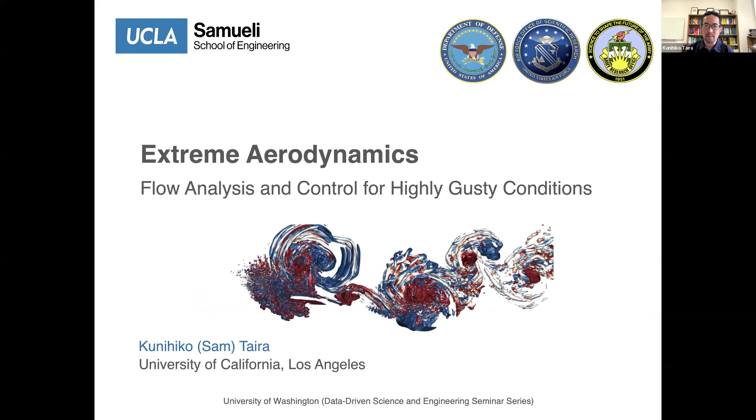So like Nick said, this is supported by the Department of Defense under the Vannevar Bush Faculty Program, and it's been something that's been keeping us quite busy for some time now. Okay, so let me get started.

Before I get started, let me acknowledge a few people, or actually a group of people. There's been an army of students and postdocs involved in our effort. Kai, Luke, Hiroto, and Vinasri are some of the main people involved. Many of them have moved on past UCLA to join as faculty or now postdocs. And of course, there are many more people who are not on this list.

We also have a wonderful group of collaborators that we get to work with. Steve, of course, has been a longtime collaborator on some of these topics. And we've been very fortunate to get a lot of support from our program managers at the Department of Defense: Greg, Doug, Matt, and John-Luc. Okay, so let me get started.

So I'm going to talk about extreme aerodynamics, but before that, you all fly, right? You've all flown on airplanes, and there are very different kinds of airplanes that serve different roles in our society. Some of you might have seen some of these airplanes. They come in different shapes, sizes, and have different ways of keeping themselves aloft in air.

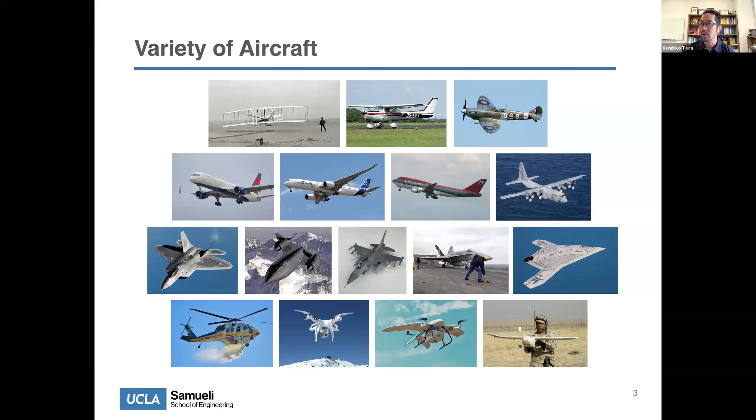But I'm not going to talk about most of these airplanes today. I'm going to talk about something that's quite different from a lot of these airplanes. By the way, a lot of these airplanes fly in cruise conditions, so they're mostly operating in what we would call a steady or quasi-steady condition, okay?

So when we talk about the airplanes I just spoke about, this is what we think about: an obstacle-free environment. This is a picture I took out of a window from one of the Delta flights I've taken, at LAX early in the morning. You can see that there's no clutter around the airfield, right? So there's no obstacles around it.

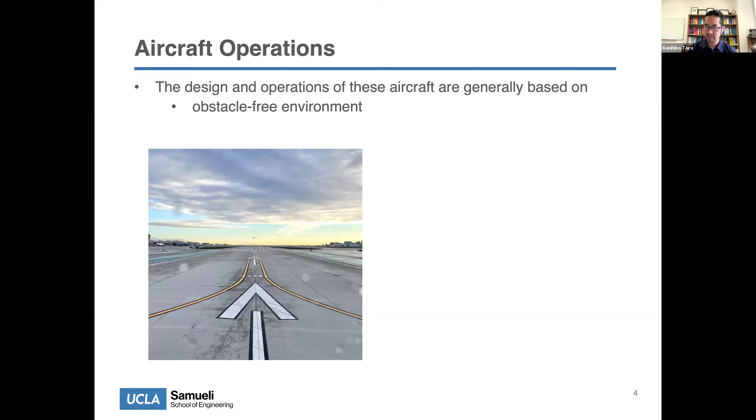And there are strict rules about where you can have obstacles, how far it needs to be from the airplane. And we tend to fly in favorable weather conditions, or we want to, right?

What happened here was there was this gigantic vortex called a hurricane, right? And when you have adverse weather or weather events, you kind of want to avoid that if you want to stay safe in the airplane, or maybe not be bounced around.

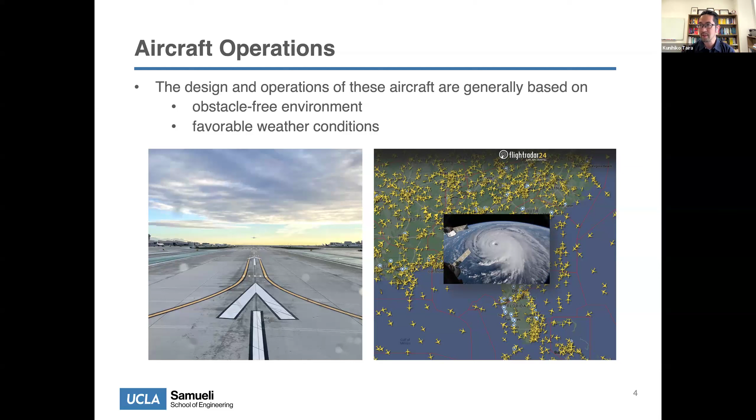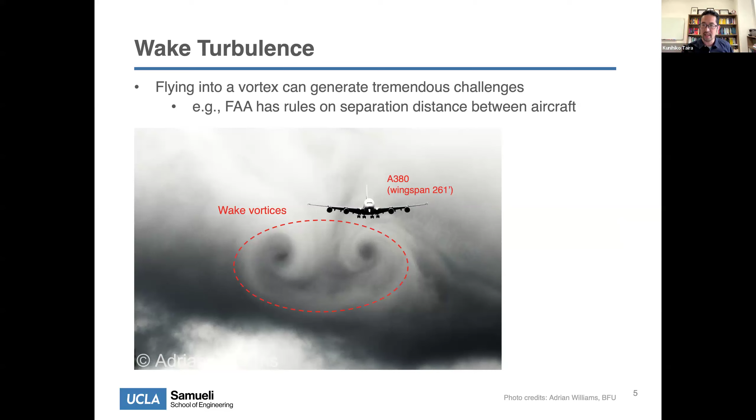The A380, if you've seen it in the past, is a pretty giant airplane. And what happens is it generates a big signature behind itself as it's flying.

You certainly don't want to fly anywhere near those wake vortices, but there was an unfortunate incident over the Indian Ocean where a Challenger 640, an aircraft much smaller than the 380, flew into those wakes a few miles downstream. The wake vortices are pretty strong. They're persistent and will last there for a while. The weight difference between a 380 and a Challenger 640 is about 25 to 1, so it's lightweight compared to a 380. And if you fly into the wake of one of these, bad things can happen.

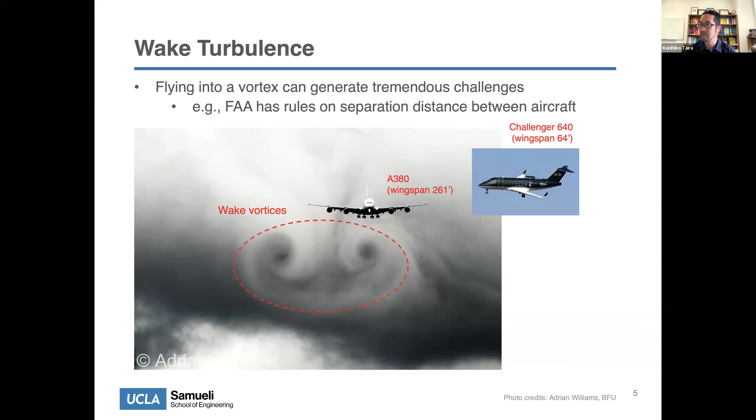By the way, don't think this is only for rich people, although that is a private plane. That's the same thing as well. That plane also serves as regional jets, so you might have actually flown on one of those planes as well.

Here's what happens before and after this plane flew into the wake. Before, I don't know if this is the exact picture, but I'm sure it was a very nice chartered flight. But afterwards, the plane went upside down, bounced around, and you can see bloodstains all over the cabin. There were some critical injuries. Luckily, no one died, but this plane was written off afterwards, and it miraculously did not crash into the ocean and landed somewhere in the Middle East.

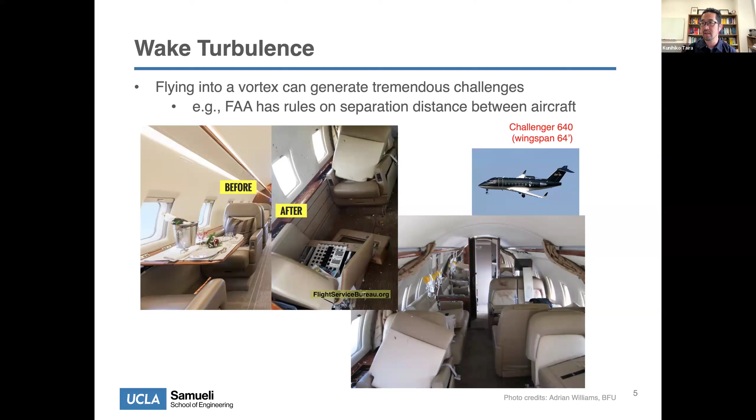So you can see that these wakes that these airplanes make are significant in strength, and can disrupt flight safety. Now, what I'm going to talk about today is not those big planes. I just wanted to illustrate the point that these wake vortices are pretty strong.

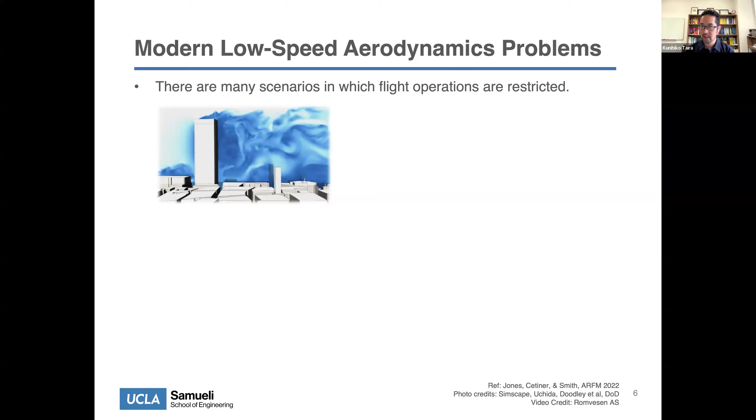Let me talk about modern low-speed aerodynamic problems, where we have many scenarios in which flight operations are restricted. For example, you might have heard of air taxis. But think of trying to fly an air taxi in bad weather, with strong winds that generate a wake behind a building. You might also think of flying a drone for certain reasons, but now those vortices are pretty strong and larger than the vehicle that's trying to fly.

Another instance is when you're trying to perform rescue in a mountainous area on a windy day. The wind speed could be large, and the vortices or wake structures behind a mountain could be maybe even larger than the vehicle you're trying to operate. In fact, this is one of the major reasons why rescue missions are still restricted because of weather.

Another thing that might be interesting to consider is what happens if you want to land an aircraft or a helicopter behind a ship. The ship itself is a large structure and it generates a wake itself. If you want to land a helicopter or rotorcraft behind that ship, you're really landing straight into those vortices. This is a huge problem, not only for manned missions, but also for autonomous systems trying to maneuver with limited sensor measurements.

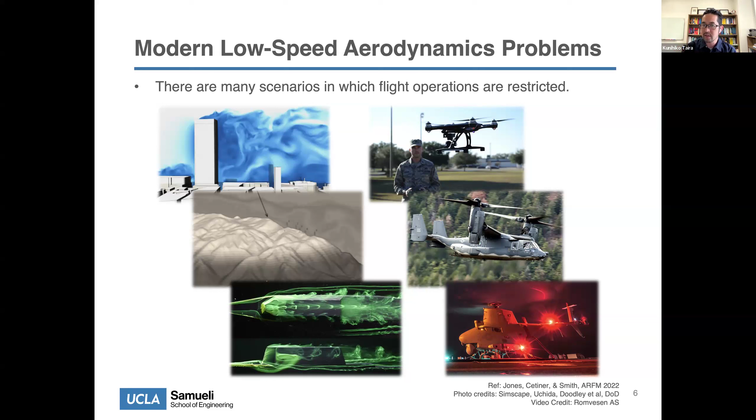So why is this challenging? I'm going to talk about why we're excited to use machine learning and data science for many of these problems. But first, before I talk about the overall problem setup, let me talk about why we haven't really worried about this. If you're on a commercial airliner and you experience a gusty condition or turbulence, and your coffee spills, it really isn't going to compromise the safety of the flight. It's uncomfortable, but not a big deal.

One of the important parameters here is called the gust ratio: the characteristic velocity of the gust that hits the aircraft relative to the cruise speed of the vehicle. Because large aircraft fly so fast, the gust ratio is really low. As you make your aircraft smaller and slower, this gust ratio starts to approach 1, and that's when things become uncomfortable, because at some point you're going to lose the stability of the aircraft. In fact, anything beyond a gust ratio of 1 is traditionally considered unflyable.

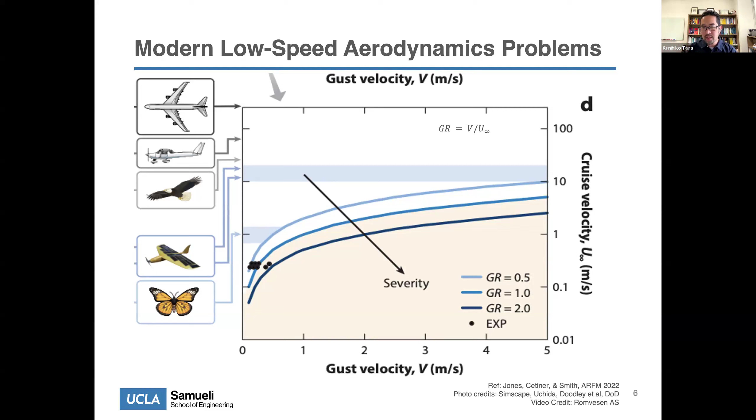In this talk, I'm going to talk about aircraft that looks kind of like this. We're going to model the behavior of the aircraft with a straight wing that will be flying all over the place at very high angles of attack.

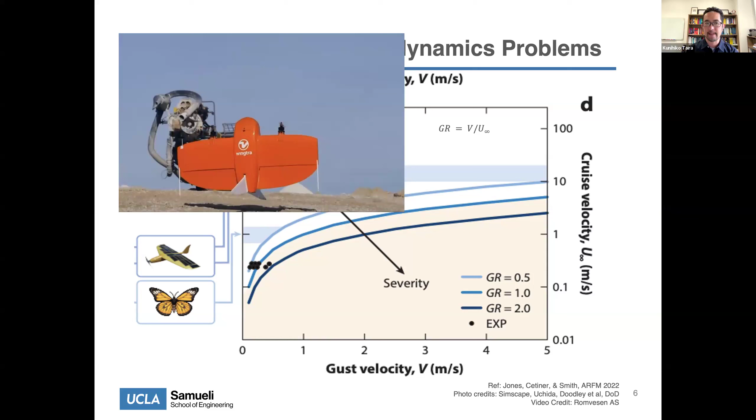Again, this gust ratio is pretty important, and as I hinted, when the gust ratio exceeds 1, the role of the disturbance and the vehicle switches. In this talk, I'm going to refer to aerodynamic problems with gust ratio larger than 1 as extreme aerodynamics. So that's where the name extreme comes from.

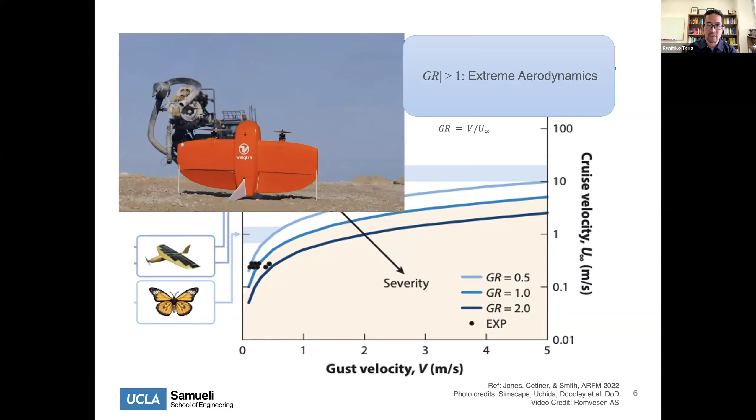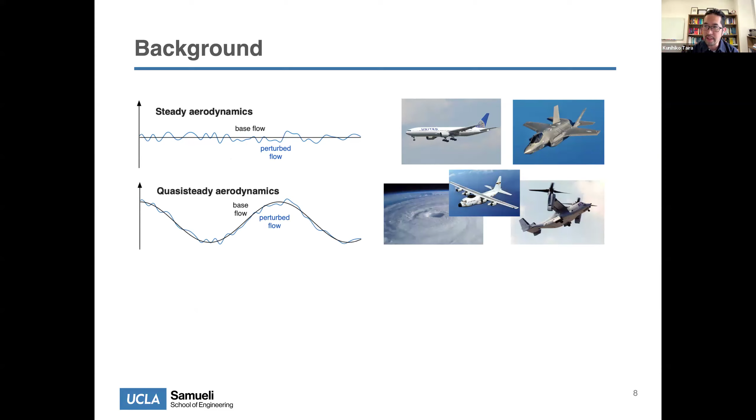Now, if you want to move beyond that, you can look at quasi-steady aerodynamics. Let's say you're brave and want to fly into hurricanes as a hurricane hunter, the base flow or conditions around the vehicle are changing, or maybe you're changing the shape of the vehicle as you're flying, like a V-22. In those cases, the perturbations are still small and there's the base flow around it.

Now, what we're considering in extreme aerodynamics is when the base flow is violently changing, and the disturbance around that flow is also changing, and those magnitudes become equivalent, almost in size. So think of the spatial and temporal scales now being very difficult to distinguish between the base flow and the disturbed flow.

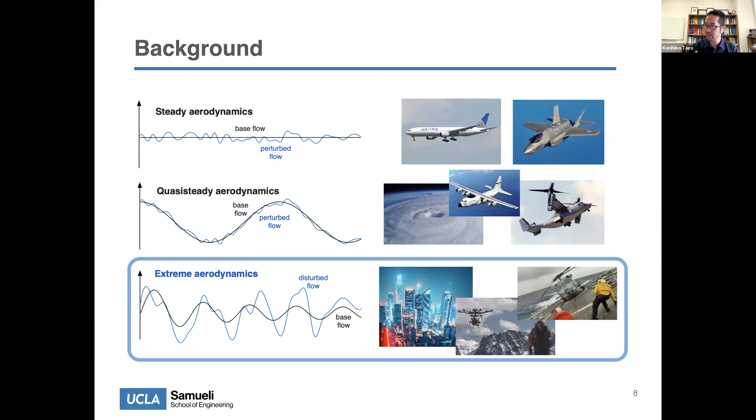So you would imagine linear theory is really not going to help much in these cases. This is where the major challenge comes from when we start looking into extreme aerodynamics. But this is really critical for us to understand if we want to make a breakthrough in flying in these highly unsteady environments.

So what are the really big challenges? I said earlier, extreme aerodynamics deals with large amplitude disturbances. They're not really perturbations anymore. So linear theory is likely not going to work in many cases.

The dynamics are inherently transient, and I'll come back to this later. We usually deal with steady flows or periodic flows, but how do we deal with transient cases? That's going to be important.

We also need to choose appropriate model problems. Time-varying base flow needs to be considered. That means we need a large parametric sweep requiring an enormous amount of computations and experiments. So this goes back to the model problems - we need appropriate model problems chosen, and we need to capture an appropriate parameter space that would capture the important physics we're trying to understand.

This requires us to analyze a massive data set, as I'll show later. Even for a simple problem, this quickly leads to a massive data set. From that massive data set, we want to extract physical insights. We can't extract each and every little detail, but we want to get the key dynamics, the low dimensional behavior of extreme aerodynamics.

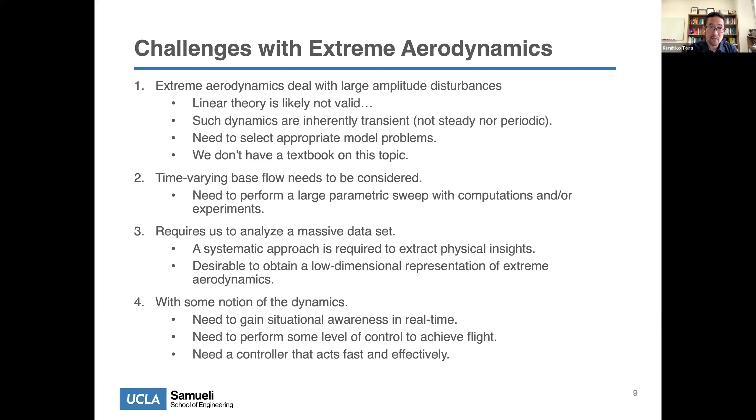And given that notion of dynamics, as an aerodynamicist, I'm interested in making sure these airplanes can fly. That means we need to gain situational awareness around the aircraft in real time and act on that information so that you can control the flow or control the vehicle. And that needs to happen fast. These are the challenges associated with extreme aerodynamics right now.

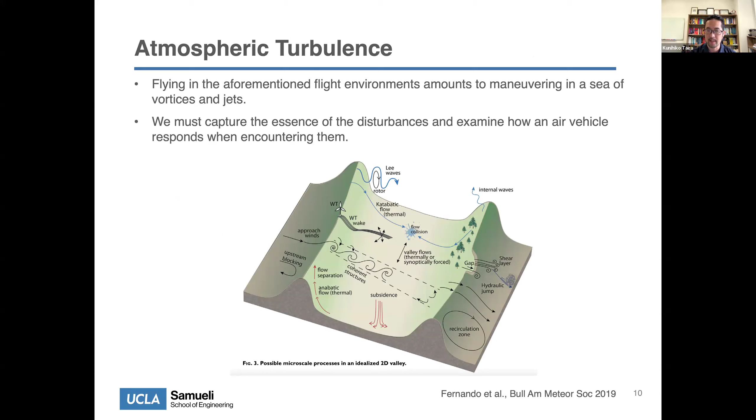Another big thing is if you want to fly in real turbulence or atmospheric turbulence, there are a huge variety of disturbances an aircraft can be hit by. I'm only going to consider a few of these that I'm going to show today. All right, let me start with a very seemingly simple example.

Here we have an airfoil, or a 2D wing, that's going to be hit by a really strong vortex. This vortex is rotating and approaching the wing. It's laminar, so the Reynolds number is 100 in this case.

You could say, well, it seems like a simple problem. But this quickly gets out of hand because the vortex strength, the circulation, the size of the vortex, the position at which the vortex hits the wing, the profile of the vortex, the angle of attack of the wing, the shape of the airfoil, the phase, the timing at which this vortex hits the wing - these can also be varied.

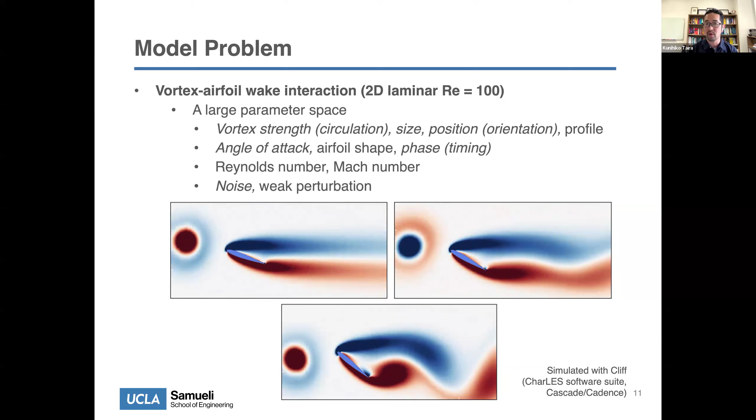If you want to go further, you can also consider what happens when the Reynolds numbers change, the Mach numbers change, or if you have noise around the wing. Another thing you can think of is, well, these movies show a single vortex hitting, but what happens if you have multiple vortices? If you were to map out this data set, even for 3 variables, or actually this is 4 rather - the angle of attacks are changed in different plots.

D is the size of the vortex, G is the gust ratio, how strong the vortex is, and Y naught over C is just the initial position at which the vortex hits the wing.

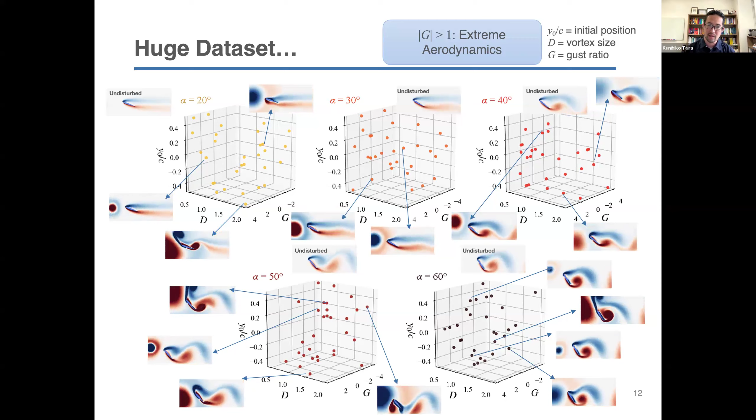These dots in these scatter plots are showing a single case, but each case holds a simulation of the unsteady flow field. So yeah, it gets quickly out of hand. All the data becomes really large and you start filling up your hard drive pretty quickly.

Now let's look at these flow fields a little bit. I have a lot of information, so bear with me. In this column, these are the cases without any disturbances hitting the wing - pretty simple 2D flows. Initially at a lower angle of attack, it's steady. As you increase the angle of attack from 20 to 60 degrees, you'll see this Kármán shedding - periodic orbits, really.

The lift for these undisturbed cases are shown in dashed lines in the plot to the left - these are lift history over time. The plots on the right show the vorticity field, the amount of rotation you'll see in the flow field when it's being hit by a particular vortex. Those are highlighted by circles and triangles over certain trajectories or lift histories.

Beyond the cases we're showing, there are also other cases shown just for comparison - those are in the lighter shade of curves. So there are a lot of different cases overlaid here, and you'll notice that it's all over the place. There's no simple linear scaling you can perform to collapse the data easily. This is not something you can easily do.

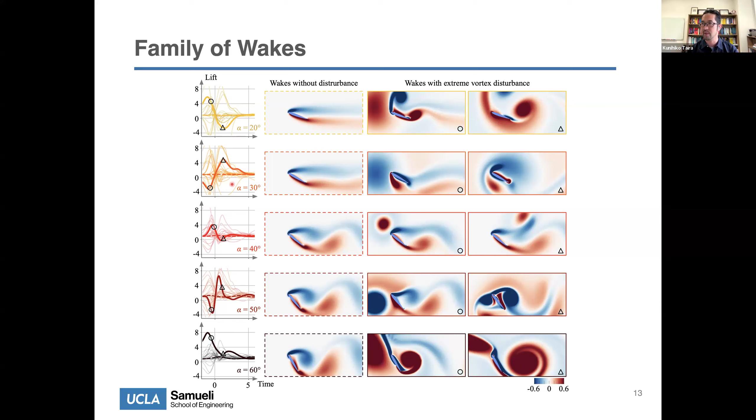That's my starting point. The first thing we tried, because we love our modal analysis, we said why don't we do PCA or POD on the entire data set? You've got all these snapshots - let's just collect them and see what we get. Based on those snapshots, let's see how well we can reproduce the vorticity field. I'm showing the coefficients - temporal coefficients of all these data sets for the first 3, the dominant 3.

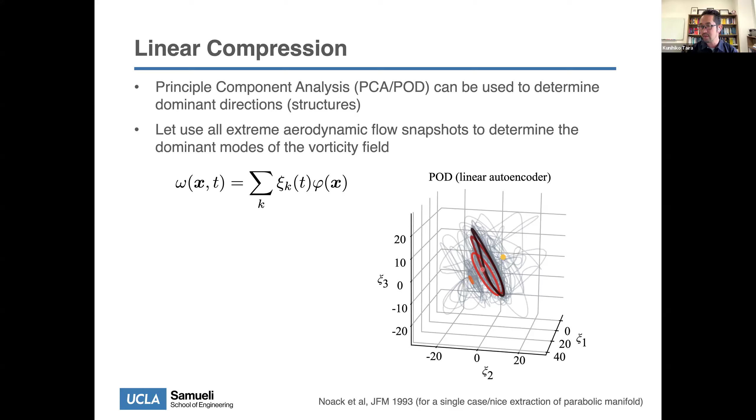You'll notice you get this big blob of data. The color represents the angle of attack. Initially at 20 degrees it's a steady flow, so it's just a dot, then it goes to the other side and so on. But it's kind of a big blob. If you try to reconstruct a flow field, it doesn't really do a good job. Using a few POD modes, the reconstruction error is 130%, and you'll see artifacts where the wing's position was - you can't even predict where the large vortex is hitting the wing. We didn't really expect this to work.

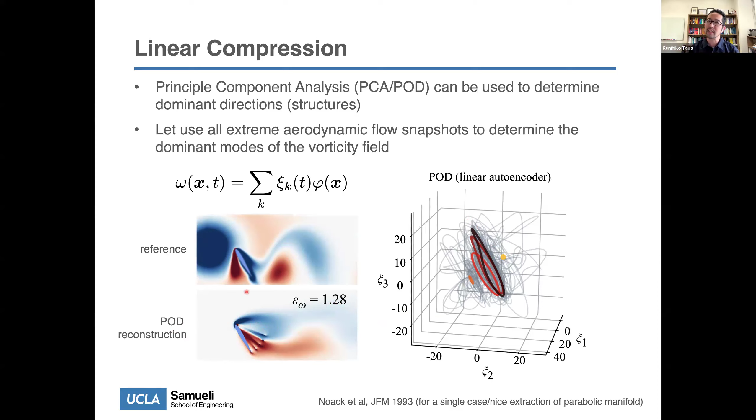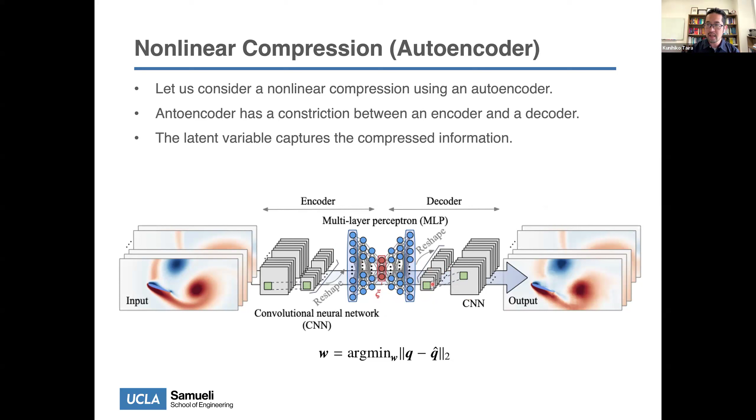So the next thing we tried was, well, why don't we use an autoencoder? The autoencoder has a convolution layer in particular for this example because we're dealing with a snapshot, then that's connected to a multi-layer perceptron. There's a bottleneck in the middle, and then we expand it out. This is a compression to see if there's a low-dimensional representation of all the snapshots shown across angle of attack, strength, positions, etc. To our surprise, it worked pretty darn good.

The data again looks like a spaghetti field - it's all over the place over time. But when you look at how well you can reconstruct a flow field from a very small number of variables, it did extremely well. I'm talking about hundreds of cases, not a few cases. Across the board, it works really well with about 20% difference or error.

You might think, well, 20%, is that good or bad? We consider that to be excellent because we can now pull out features of the vortex that's hitting the wing, the secondary vortex that's being generated, the wake structures, etc. Also, these things track very well in time.

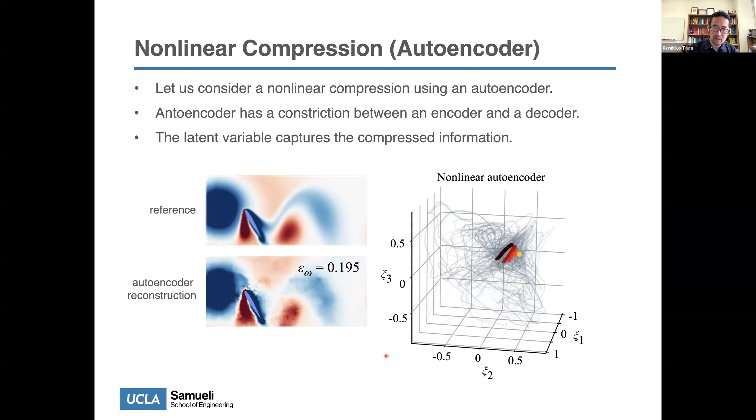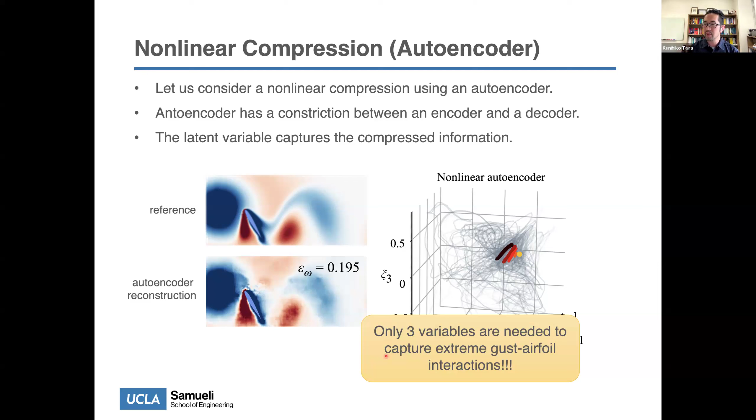However, one of the challenges that we have is that we now are able to compress it down to 3 variables, which is amazing, right? All that information being represented by 3, but we can't really comprehend what this means in the latent space, okay?

So what we did was introduce a simple fix, or extension of the original autoencoder. We said, well, we know the flow field, the omega, right? The vorticity field is intimately tied to lift. And as an aeronautics engineer, I care about lift because I don't want to crash into the ground, right? So if I know that information, what if I say I want xi, the latent variable, to make sure that it knows something about lift?

Now, this was an excellent thing to try because you can now perform this optimization problem. We're now trying to match lift as well. That ensured that we're capturing the vortical structures that contribute to lift, or are highly correlated with lift. And by the way, we tried this setup for different types of problems. It works really well if you know what the right variable is that you care about for the physics.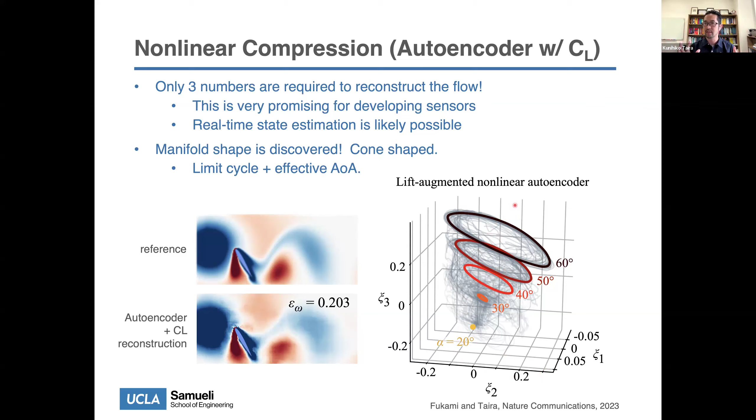If you go up in the third direction, that tells you there is an effective angle of attack of the flow. Those of you in fluid mechanics will know that effective angle of attack has a close relationship to lift, right? So if you go upward in the xi3 direction, you're increasing lift, or temporarily increasing lift as if the angle of attack is increasing. So a lot of the information we were able to get from this nonlinear autoencoder, augmented by lift, now tells us a lot about the dynamics, and everything's wrapped around here. So it could go up, down, et cetera.

So just to give you an idea, these are cases we looked at afterwards, for various conditions. Some of them were outside the training data sets, and you'll see that it wraps around these baseline cases, but it could go around and back onto it. If the rotation of the vorticity is not the right way, the rotation would go the opposite way around these manifolds.

Now look at this last case. This is a horrible case with the gust ratio being 10. That means the vortex is 10 times stronger in terms of its velocity compared to cruise, right? You wouldn't want to be flying in here, and the wing is fixed at a particular location, but this one's pretty violent, yet still does a really good job. The reconstruction is really good too.

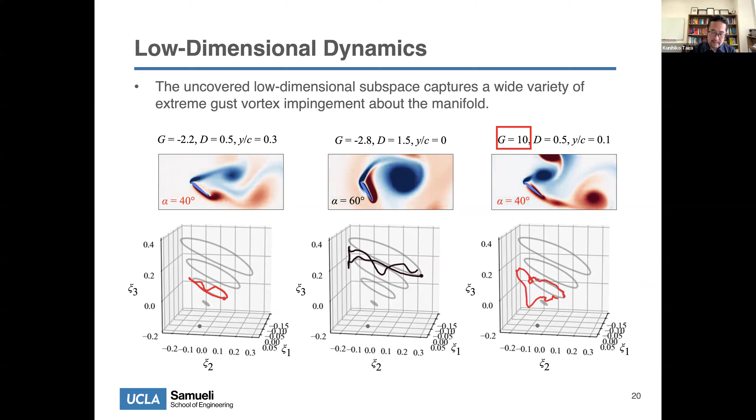Now, all of these cases were trained with a single vortex impinging on the wing, right? Then we said, well, why don't we try this: in a real environment, we're going to be hit by many vortices. So let's just hit it with multiple vortices now, which will be a more realistic flying environment.

And it turns out this particular model, because we have a CNN in there, does a fantastic job reproducing the flow field and capturing the physics even for multiple vortices hitting the wing. Because this filter inside a convolutional neural net lets us pick out these features and nonlinearly reconstruct the flow field, right? So this was a pleasant surprise. We thought it was going to work, but it worked really well in these cases. So this was very promising to us.

So I asked about the 3D nature of this compression. If you look at this manifold that we're discovering, you can argue that, well, I'm reducing to 3 variables, 3D, but what it really is, is you're projecting onto a 2D plane.

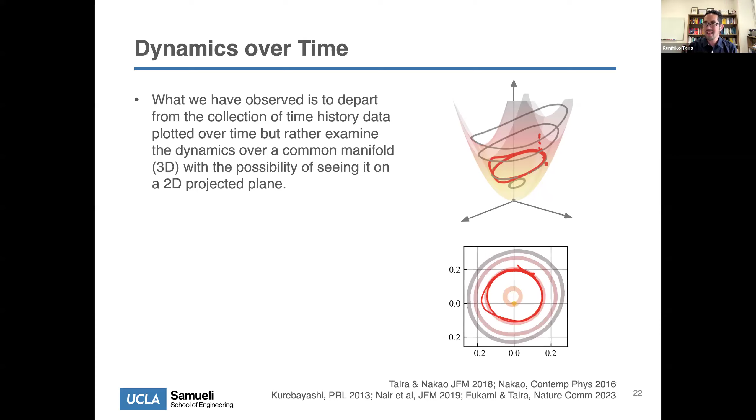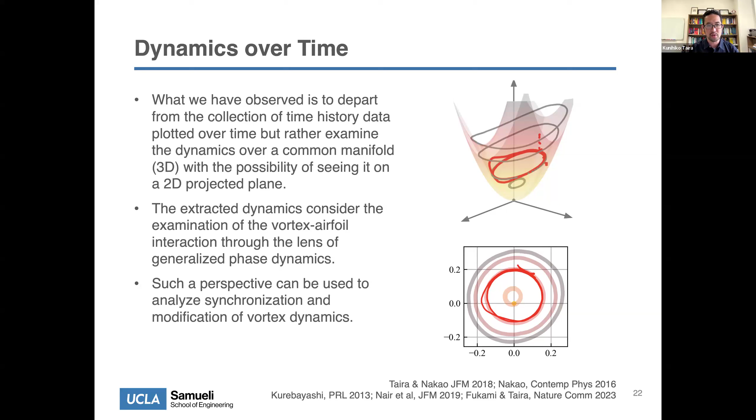So if I were to look from the top down, what I'm getting is I'm compressing all that information down to R and theta only. So now you go from all that big data down to 2D, and on that 2D, we think there's some ways to analyze the flow field. Even though this is a transient flow, we're now looking at this physics in terms of phase dynamics. This got us thinking about how to consider phase as part of our modeling effort. I'll come back to this phase dynamics because I'm going to spend a good amount of time on it, but let me show another interesting thing about this autoencoder setup.

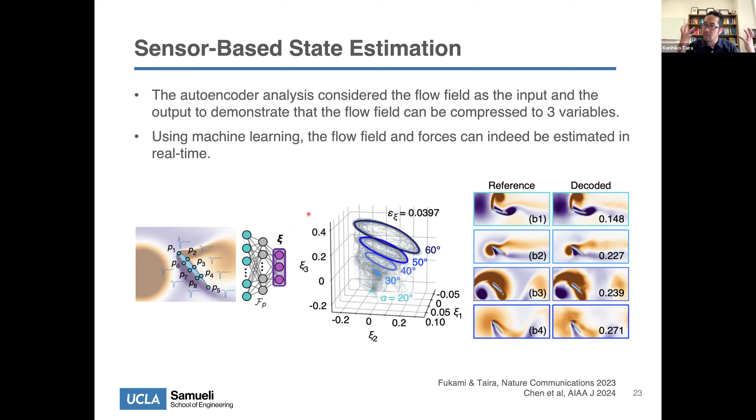It's almost like plug and play. We know about this manifold. What happens if I were to replace the input from the snapshots of the flow field to sensor measurements? Let's say I have pressure measurements, like in an actual aircraft, or velocity measurements. I would then feed that in and tune the weights so that I can reconstruct the latent space. For the decoder, I can use the same decoder that I already trained. That turned out to be doable. Now what we have is a sensor input to a flow field output, so we have full state awareness that we can use. And once you have this manifold, you don't need the flow field anymore. So there are different parts of the autoencoder that you can use for various engineering applications.

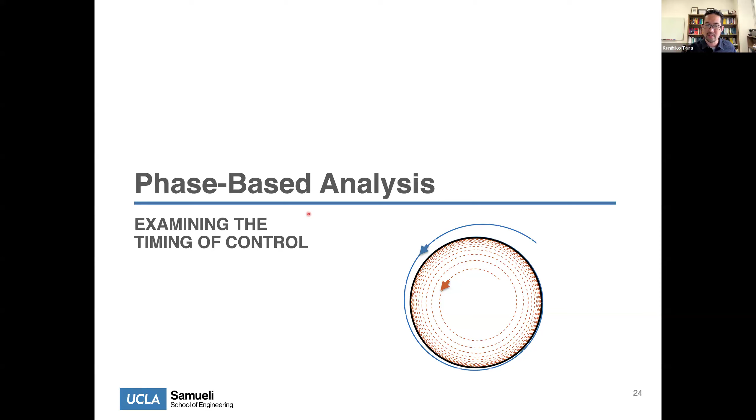All right, let me go back to phase, because I've been saying a lot about phase and these circles, if you look from a top down view. I'm going to go away from that original problem of a vortex hitting a wing, and show you a slightly different but similar problem. We worked with our colleague at the University of Maryland, Anya Jones. Since then, she moved to UCLA - she's actually my next door neighbor now. She performed an experimental campaign with a flat plate wing. In this case, it's flying from right to left.

This is a PIV flow field, vorticity field, and what's happening right now is it just went through a vertical jet. So here, it's flying, and then it's going to enter - let me play that again - it's going to enter a jet that comes from the bottom, here it is. Then it separates massively, and then it exits the jet. And then that separated flow goes back to the reattached flow. This, in my opinion, is a transient flow.

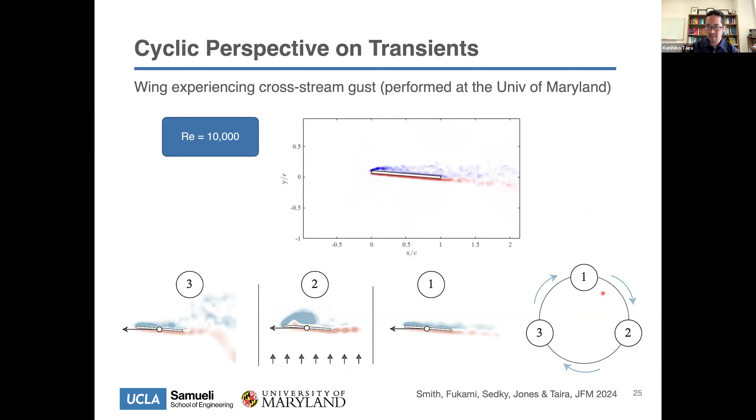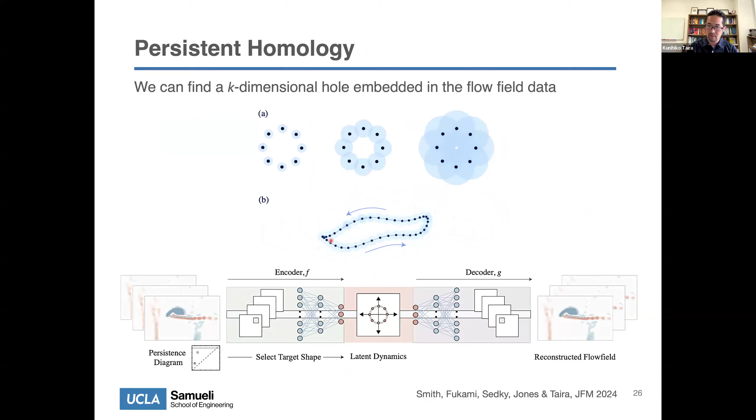But then Luke, our postdoc back then, said, well, it looks like a cyclic flow. It goes from one, which is the original attached flow, it enters this jet, and then it exits this jet. And what he said was, why can't we look at this from a cyclic point of view? And how do we do it? We said, well, why don't we try persistent homology to see if we can find that cyclic relationship or characteristic. He was able to embed this latent dynamics on a circle that he found through persistent homology, and reconstruct the flow on a circle. This kind of makes sense, because it's a cyclic event that's happening. You start from 1 to 2 to 3 entering the jet, have this massive separation, and go back to 1. So now you're compressing information onto a circle.

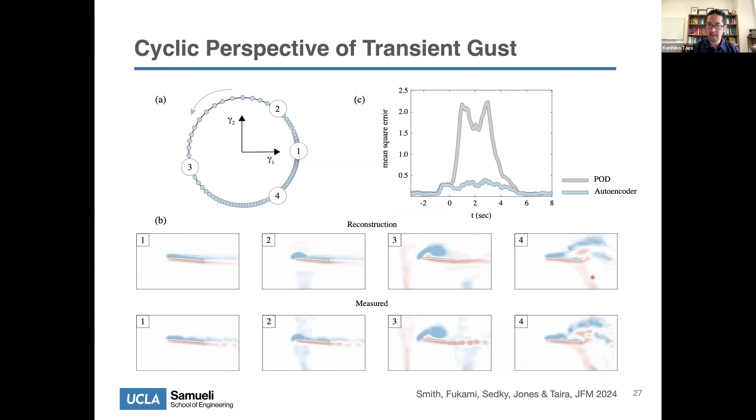That's all we're doing. But it's pretty neat because instead of doing this transient analysis, now we can think of these things on an R-theta plane, a phase-like variable. And it does really well in terms of reconstruction, everything. Here is the measurements from a PIV flow field, and here's the actual reconstruction that we can achieve through these autoencoders.

Now, why am I showing this? I got excited about this because what we're saying is the entire flow field can be compressed onto a representation of a circle. On this circle, you can get different angles of attack mapped out, and you can even do an interesting thing where you pitch the wing and you'll have a various array of these trajectories, which are cross sections of a manifold. What's interesting here is, let's say this is the original location where you started - depending on the gust ratio that hits the wing, this circle will grow away from the original location. So this really captures the essential features of this complex transient dynamics that we were trying to understand.

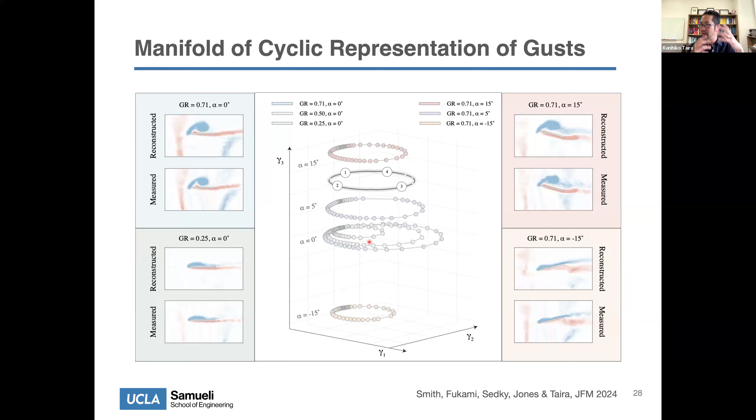So what we're saying is we have some ways of representing the flow, some ways of modeling the flow now. Now, why do we care so much about the phase? I also work on phase reduction analysis, and phase is pretty interesting in terms of how you can represent dynamical systems. Just to give you an idea, let's say you have a periodic event.

That periodic event can be discretized from 0 to 2 pi. So here, let's say this is a governing equation, Q is your state variable, and you have a phase variable, theta. Think of this as a Navier-Stokes equation. If you look at the rate of change of theta, if you're on the periodic orbit, that theta dot is simply the natural frequency of that system.

Just giving you a hint, if you go back to a transient problem, but if you don't look at it as a transient, if you look at it as a cyclic event, you can actually map all that to a circle. So that's why I'm kind of getting interested in this.

And if you go through the math here, if you say theta dot is actually represented by a big Theta, which is a phase function that lives not just on the limit cycle, but slightly outside of it too, you can write this as the gradient of theta dot q dot. Just calculus. This q dot is from your governing equation, the right-hand side of your governing equation, f. So if you know the right-hand side of the governing equation and how sensitive your phase is, you can see that the dot product will be omega n.

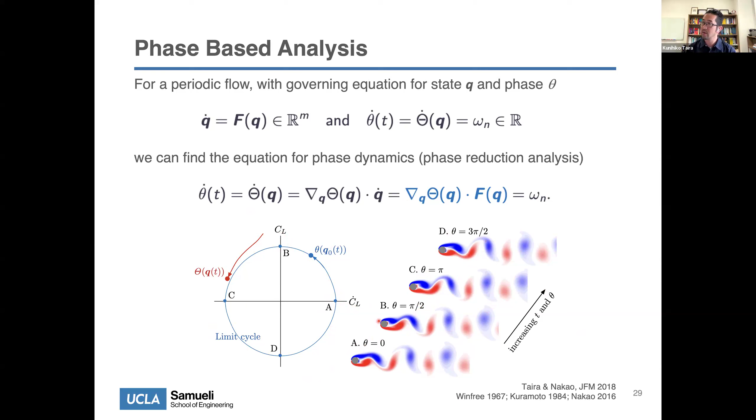This is my favorite example of Reynolds number 100 cylinder flow with periodic shedding. You can say if you plot CL and CL dot, you can see that it just rotates and rotates and rotates. And if you know what the phase is, you can always go back to the flow in this system. Now, if you were to introduce a perturbation F, that could change the phase here.

So in this phase sensitivity function, the gradient of phase, and you took the inner product, but this epsilon f could change how you could alter the frequency. This becomes really useful if you're trying to see how you can modify the synchronization property.

One of the biggest synchronization issues that we deal with as travelers is jet lag. Suddenly you're in a different location and you want to synchronize to the location's circadian rhythm. But you would synchronize.

Another thing you can do or analyze is a lot of biological signals in your brain. How do you synchronize the brain so that you would function normally or better? These are the things that you can analyze with these.

What we've done is we took these theories and analyzed how we can synchronize the wake that's shedding to whatever signal you're trying to put in. It turns out this is a really well-established field. One of the pioneers was Kuramoto. You might have heard of his name on a few equations.

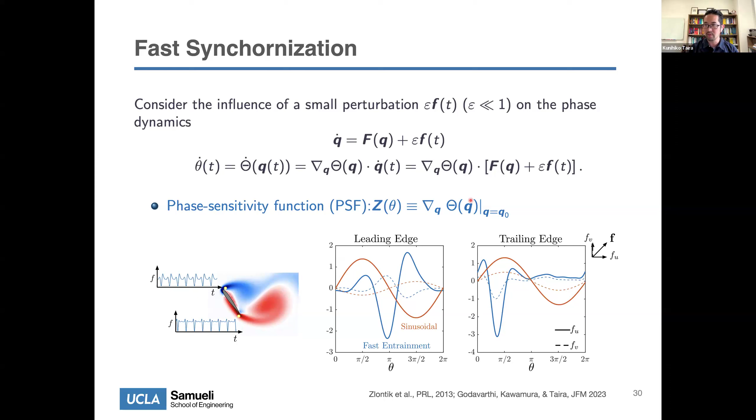And there's even a theory to say, well, if you want to synchronize as fast as possible, what is the right optimal waveform? In those cases, instead of waiting for 20 cycles, you can figure out how to synchronize in 1 to 2 cycles, which is important for our problem because we're flying in a highly transient environment.

So this is what Kai was doing when he was analyzing all those transient data. He analyzed how sensitive the flow field was to certain types of perturbations. In this case, he put in a jet at the leading edge, the very front of the wing, and saw how the flow could respond.

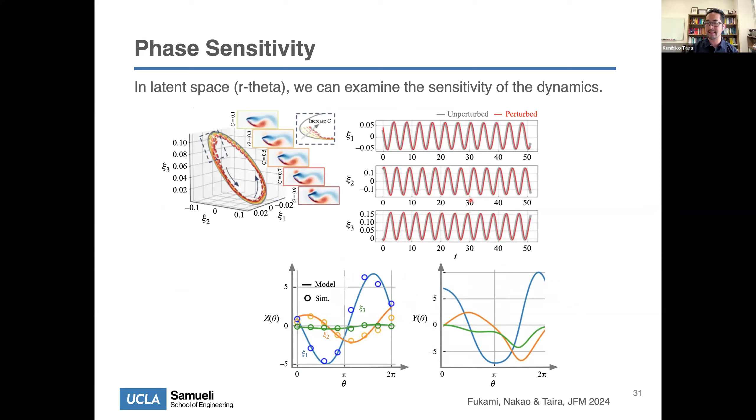And if you do so, this is the slice of manifolds. Here is the controlled and no control case. He was able to reduce those large fluctuations in lift by about, I would say, 40% or so. The measurement's pretty strict, but roughly half.

This would be extremely difficult to achieve with standard methods, because in standard control-type methods for fluid mechanics, you're assuming that the wing is traveling 20 to 30 to maybe even 100 chord lengths of travel.

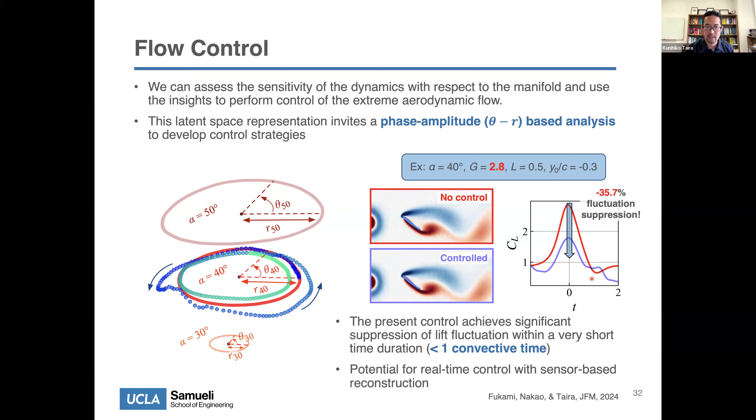For us, that's too late because the vortex has already left. It's way downstream and we're being hit by another vortex. All right, now what are we doing now? I've got maybe 10 to 15 minutes.

So let me talk about the other efforts we're looking at. We can also consider dynamic maneuvers. Here's a case where Hiroto was considering plunging motion, and based on different plunging amplitude and frequency, you can identify different orbit patterns, like a manifold I showed earlier. What's interesting is these orbits look like the atomic orbits we learned in chemistry. So you can pull out patterns: here's how the wakes are behaving, and that's quite different or orthogonal to other types of wakes. By knowing those patterns, we can make really nice models.

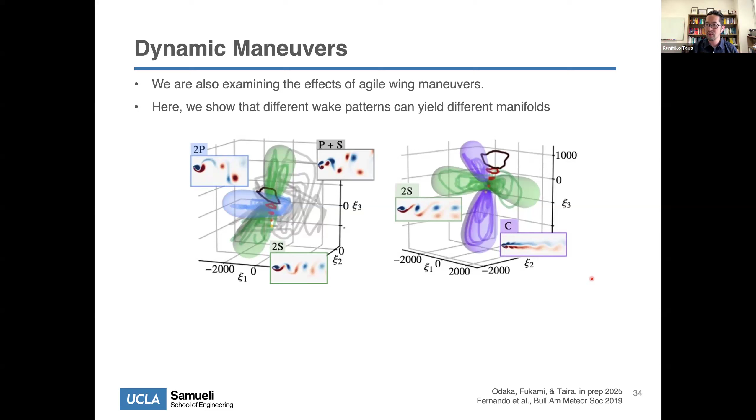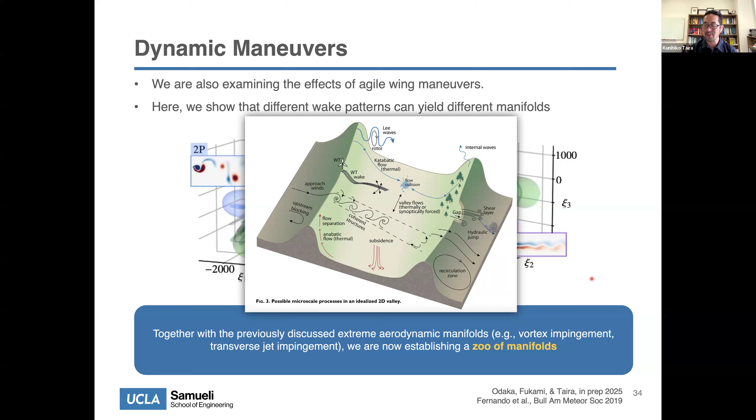So the idea is that we're trying to find zoo manifolds. Nathan, I got the word zoo from you because in the past you gave a nice talk about a zoo of neural nets. So I stole that zoo from you.

This effort is also now being extended to more complex flows, like turbulent flows that I showed on my title slide, and this is going to be really nasty. If you look at gust ratio 1 or 2, and the vortex hitting the wing for higher Reynolds number, say 5,000, you can see these vortices collapse and break apart really fast. But one nice thing we noticed is that the large-scale features are still the same. So even though we were looking at Reynolds number 100, a lot of the insights we've gotten are still useful and can be transferred to the analysis at high Reynolds number.

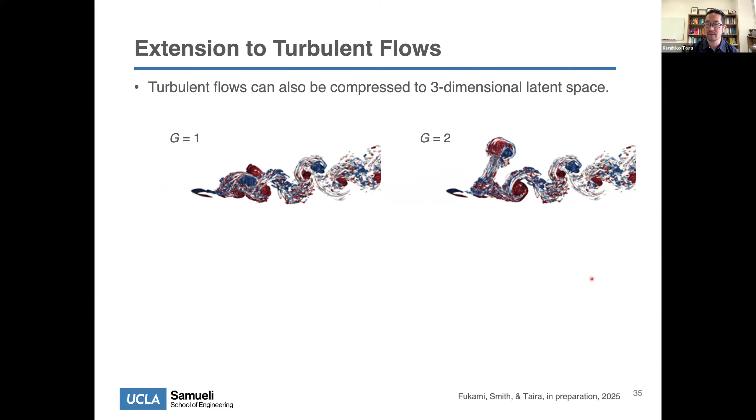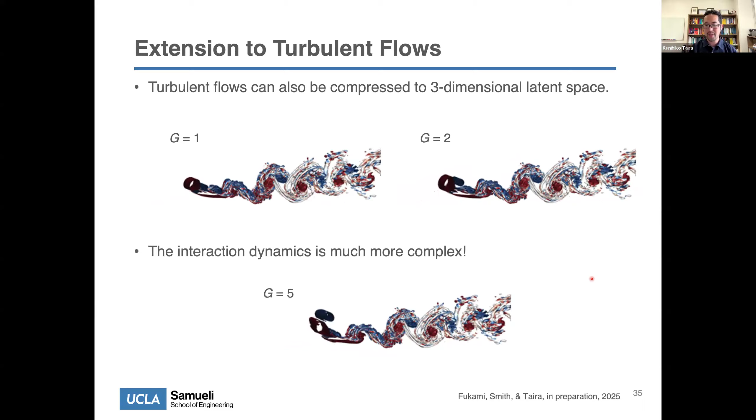Just to give you an idea, if you look at much stronger vortices like gust ratio 5, this is an interesting case, a really bad case. A vortex hits and hits again, so you can see you get double peaks in the lift as you're flying in these really violent cases.

Now if you consider 3D wing effects, which is what Hiroto is currently looking into, say you fly into a column of a vortex. The dynamics is a lot more complicated than 2D. I'll just show these movies. These are two different orientations of the vortices, with different rotating directions, but you can see how complex the wake becomes.

Through this analysis, we're actually able to get ideas as to which structures are important to rely on to reduce lift. That can be done by looking at force element theory.

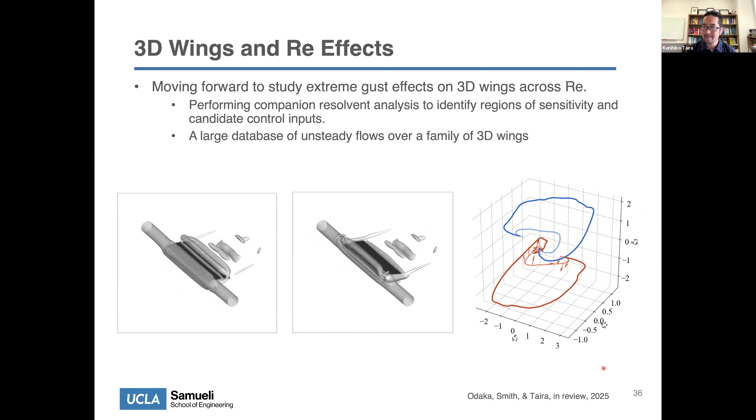Another thing that was surprising but really relieving for us is that when you try to compress all that flow field information across different cases, it's still low dimensional in nature, at least to get the dominant features of the flow. So here is Hiroto's effort to reduce all that information to a three-dimensional latent space. He's still able to capture the dynamics and understand which directions the flow should be moved or altered so that the lift fluctuations can be minimized. Stay tuned, we'll get more results on these.

This is a collaboration with Steve's group that we just got published recently in Flow. Say you're trying to fly in a really unsteady environment like a cylinder wake, a 3D cylinder wake, trying to fly from red to green circles. In this case, if you don't take advantage of the vortices in the wake, you can't really make it to the final position.

Some of you might be familiar with the two-dimensional work done by John Dabiri's group a few years ago. In 3D flows, you can take advantage of the streamwise vortices and screw into those structures to get to your final destination in a very efficient manner.

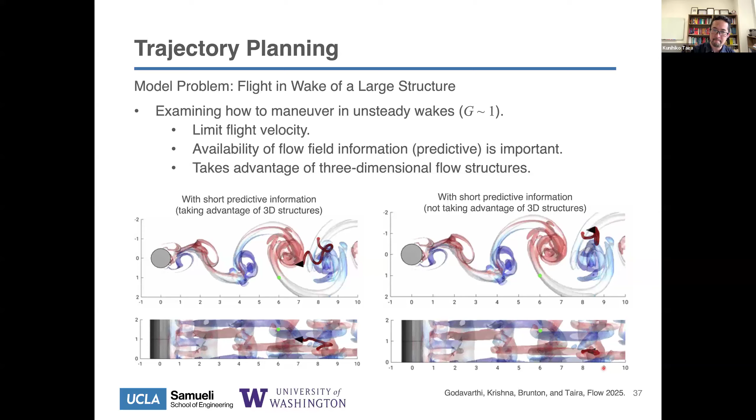Of course, you're going to be hit by vortices, and we're hoping that all the insights we're gaining from the extreme aerodynamic analysis can be useful in further optimizing the flight pattern and stabilizing the flight too. Right now there's no interaction between the vehicle and the wake, it's just one-way coupling, but this will be something we'll look into in the future.

Now, this is something I wanted to bring up more as a teaser, and maybe get some feedback on.

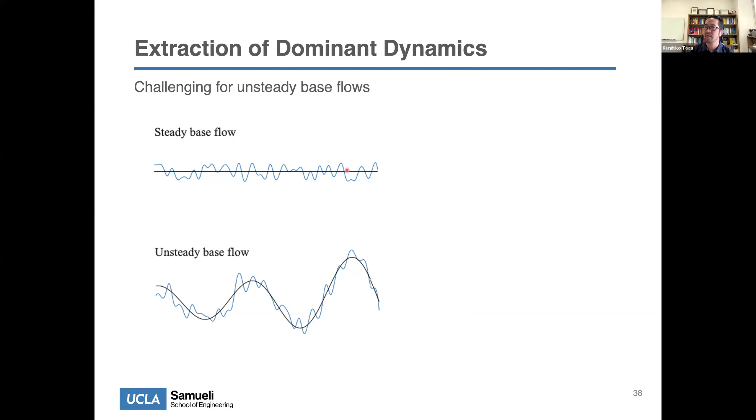The extraction of dominant dynamics for unsteady base flow is a major challenge. A lot of you are familiar with POD or DMD type analysis, even stability, resolvent. They work pretty well for steady base flow. Now the question becomes, what do you do for unsteady cases? And I'll even go to say, getting unsteady base flow itself is a challenge. It's not as easy as just simply solving for unsteady base flow. In many cases, you can't even solve for unsteady base flow. And if you were to just filter the flow in time and space, that may not be enough either.

We just published or compiled a paper that's now on arxiv. It's in press right now. We said, well, where are we? If we want to study unsteady base flows and the dynamics around it, we cover modal analysis, causality, optimal perturbation theory, all that. This is an area that I think we're going to be working on quite a bit so that it can help unsteady aerodynamics. One thing that's missing from this paper is we did not intentionally talk about machine learning, because that's also a whole other effort that we can talk about.

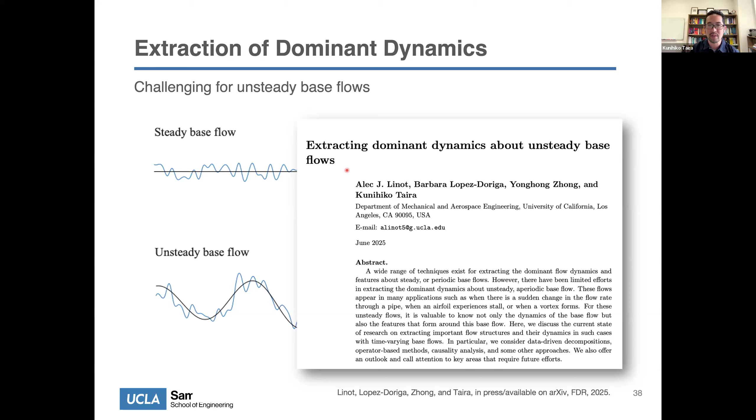Just to give you an idea, if you have unsteady base flows, one of the biggest differences you'll notice is the influence of acceleration and deceleration from the background. Now, this is an example where Yonghong Zhong, our graduate student, was looking at how the vorticity would hit the flow, and according to those timings, what kind of perturbations can grow the most. We use the optimally time-dependent mode analysis, where we can actually track the modes and see which part of the flow is most sensitive.

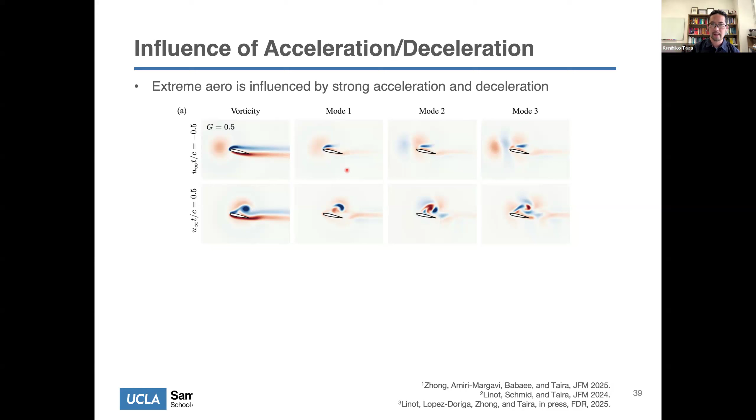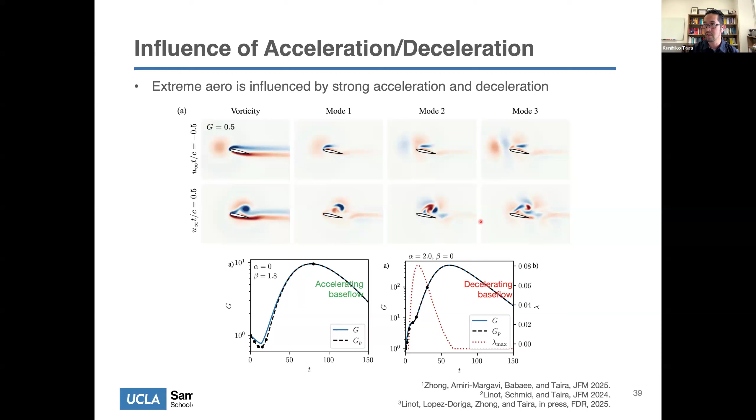Another thing we've done is we actually looked at a simple canonical case of a channel flow. What happens if you were to accelerate or decelerate the flow? When you accelerate the flow, you can see that the growth rate of the flow field for certain types of modes increases by 10. However, and this was kind of known experimentally too, but we confirmed it here, if you have a decelerating base flow, you can have an explosive instability or amplification of your modes. In this case, it's 10 to the 3. This one's 10 times. This is 1,000 times larger in terms of instability. So as you're flying in an accelerating or decelerating environment, this tells you that in some cases you might be able to break up structures if you can take advantage of deceleration, or stabilize the flow if you're going through an accelerating phase of your flight. This is something we're really excited to explore more.

I showed you a lot of dynamics in latent space now. Another effort that I got a chance to talk to Nathan about a little bit is, well, how do you use that latent space information in another way? Another thing we're also looking into is how to look at designs of vehicles. This is an effort not on air vehicles, but a collaboration with the Honda Motor Company, where we're taking different types of car designs and compressing that information while we're trying to get some information about aerodynamic characteristics. Here we're showing drag. Sorry, some parts of this work is proprietary, so we're not showing the full extent of the work, but you can get other stuff out of this autoencoder type effort.

This is great because what you can do is you can compress all that information to a low dimensional space, and in that low dimensional space, you can do a design optimization. This is an actual example, a CRV model. Here's an original design. It's digitized, so it looks a little choppy, but based on all the information that we have from a database, we can now automatically grow through the latent space and say, here are the regions of the body that we can change such that you would get better efficiency, lower drag. And this agreed very well with what the engineers have seen in the past, so they're very excited.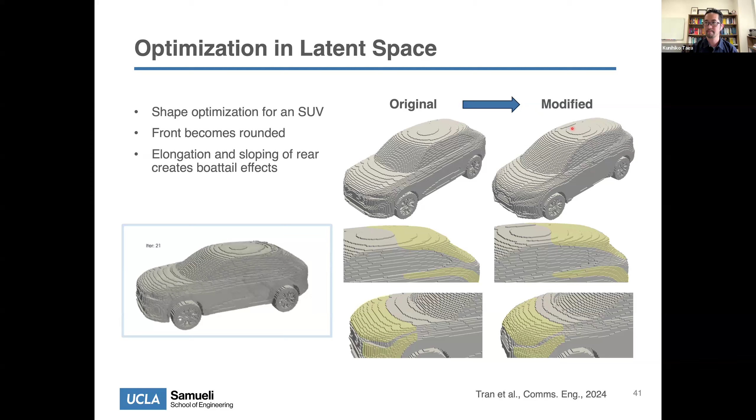Another thing that's really exciting is that because there's an automotive industry shift in terms of what they're trying to do, from a conventional gasoline-based engine to motors, electric vehicles, or hybrid vehicles, the requirement for aerodynamics is changing quite a bit. And also what you can change inside a vehicle is changing. You don't have that engine that you have to cool anymore. So the front grille area requires a complete redesign. Cooling requirements are different. The grille, you don't have to have the same types of holes that would get the air in. And if you have simulated vehicles in the past, you would know that to get the right aerodynamic characteristics, you have to simulate even inside that engine compartment. So this is a major effort that the automotive companies are going through.

All right, so let me just conclude my talk.

As an aerodynamicist, it's a really exciting time for me to be looking at these unsteady problems, because it's not something that we traditionally dealt with. Now, it comes with a cost, right? You have to simulate a lot, or do a lot of experimental measurements to see what kind of features you're going to get in the flow. This, to me, is a perfect place to use machine learning and data science to compress the information, understand the information, and act on that information.

So I've shown you some of the stuff that we've been doing for flow control and design optimization, and I think the data-driven approach is going to further advance the field of unsteady aerodynamics, or extreme aerodynamics. I'll be looking forward to talking to you all more, and thank you for listening. Again, it was an honor to talk to you guys, and I'll be happy to answer any questions. Thank you.

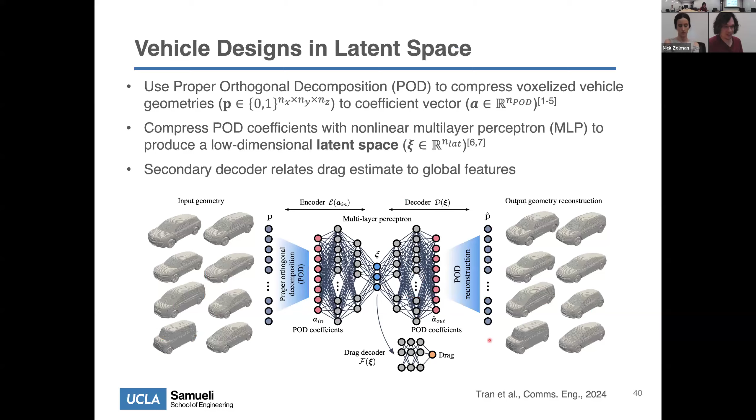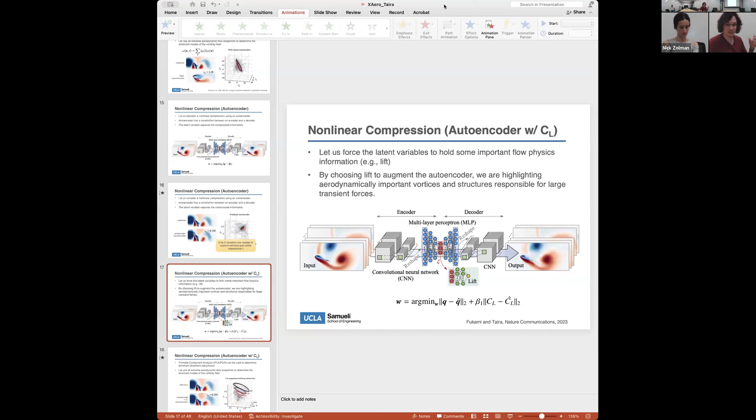I had a quick question regarding the autoencoders that you're using. So when you added in the consistency with the lift in the first autoencoder that you showed, you got a much better structure of that latent dimension. Had you also considered directly putting the parameters, like the angle of attack, into the latent dimension itself, like some sort of conditioned encoding, I suppose?

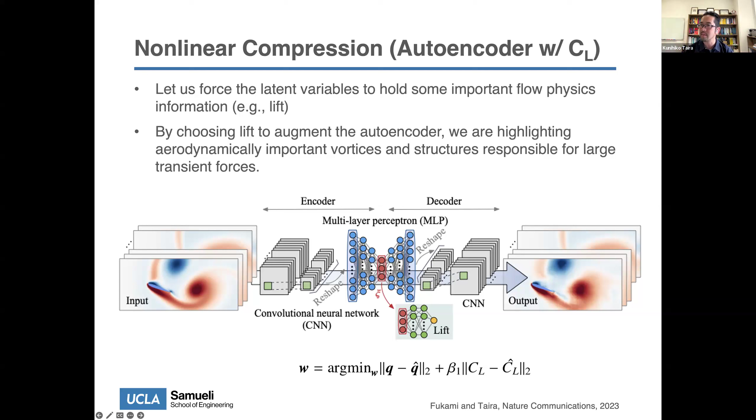Yeah, that's an excellent question and suggestion. We've actually tried that too, and you can get a good representation in some cases. There's another effort by our postdoc Barbara. She's looking at the effect of the wing shape, so you can have different types of wings come into this problem, and in that case she's feeding the wing geometry parameters into the autoencoder, and it could be on the input side or output side. You can get some compressed latent space to behave or layer in a nice way. Stay tuned, because we haven't really finalized how we should do this well, but I think there's some room to play there too, to get some nice interpretable data like this.

Yeah, and when you were doing this, you didn't put any temporal information into the latent space either, right? You were just... No, no. So that's another excellent point. There's a sequence of data just fed in, but we didn't say that it needs to be one after another. I've received a suggestion when I gave this talk recently at a different place: why don't you feed a movie, instead of still images? Can you deal with movies? And that's actually important, maybe a point to consider too.

You can also set not just a lift function, but on the output side try to get a set of ODEs, and you can do that too, so that you can get more dynamical information as well. But I think there's also room to grow in that area.

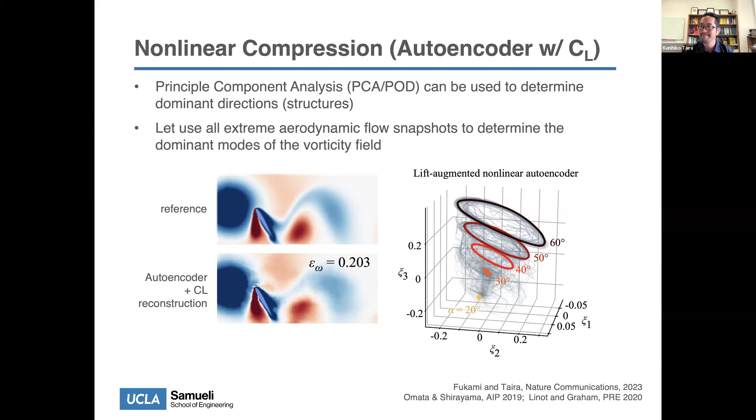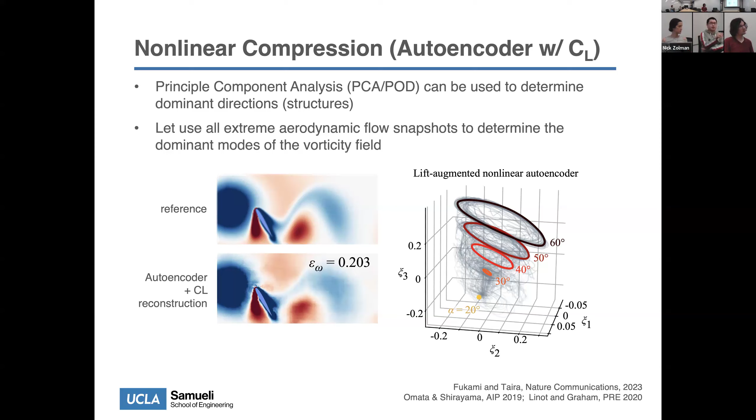Sure, so for example, in the more complex case, when you try to restore the state space, you may face the scenario that one vortex is hitting the wing while the aftermath of a previous vortex is also exerting on the wing. In these kinds of cases, can you separate the contribution to the lift between the newly coming vortex and the aftermath of the previous vortex?

That's an excellent question. I haven't thought about that, but I'll give you my guess. It's difficult because this is a highly nonlinear flow, right? When you get separation, everything's really nonlinear in fluid mechanics. It's going to be difficult to separate out which part is from the first vortex versus the second vortex, or subsequent vortices. So I think it will be difficult to say some lift change in between is from vortex one or vortex two, but I think we can identify, in some nonlinear way, how one is influencing another.

I think one thing you can do, you can play God in some sense here, is artificially remove one vortex and another vortex and see what the contribution will be like, or examine what the sensitivity is like. You can do that. But I also want to give you a fair warning that there is an actual theoretical way to figure out what the contribution of each of these vortices are, from things such as force element or force partitioning methods. So I would say a combination of those two would be important for the analysis.